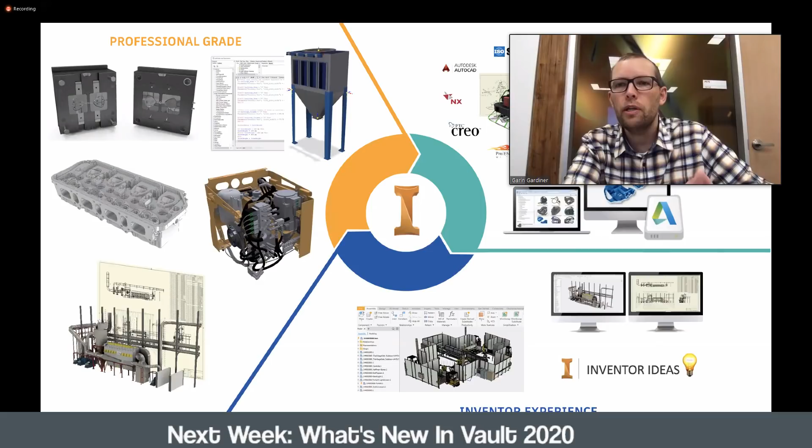We also look at the connected workflows. So that could be through tools like AnyCAD that allow you to associatively bring in non-native Inventor data into Inventor and utilize that, and look for ways that we can make that experience better. Also things like shared views, so that you can share designs outside of your organization for redlining and just conversations.

And then finally, just the overall Inventor experience. Some of that is the UI, just the experience of using the product, installation, Inventor ideas. We get a boatload of Inventor ideas every year. Dan spends a lot of time out in the discussion forums looking at what hot topics are out there, what things people are looking for, and then seeing what we can do every release in that area. So throughout today, you'll hear a number of things in each of these areas that we've really focused on and spent a bit of time on.

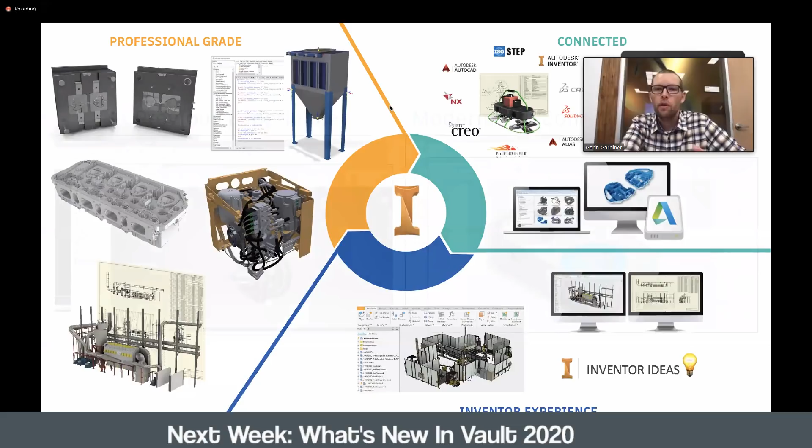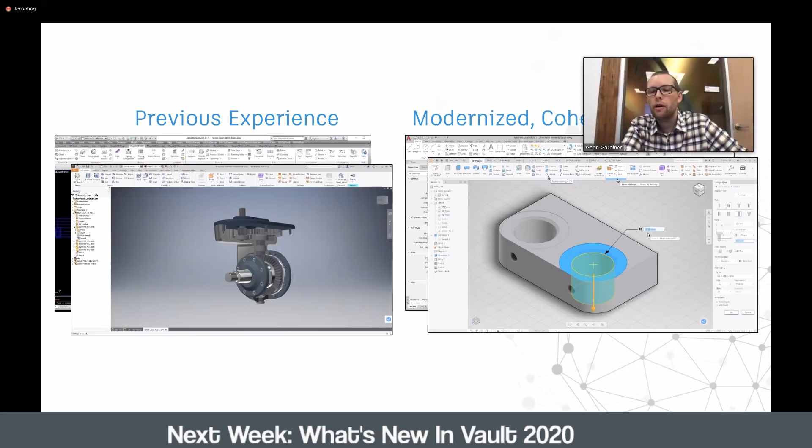One of the things we're looking at is really trying to have our products look similar, have some consistency across them. So you'll notice we've got a lighter theme, newer icons, and some consistency with a lot of those icons and the coloring with tools like AutoCAD. We've adjusted lighting styles, modernized those, brightened them up a little, an icon refresh, feature manipulators. And we've been working on what we call the Property Panel for a couple of years, and I'll get into that a little more.

It's a more intuitive, quicker way to get through a lot of your standard tools that you use day in and day out. And another thing we did, we added the ability to easily switch between a high quality, a middle, and a performant quality graphic experience. I'm guessing as you're doing most of your day-to-day work, you probably work in a performance mode, which turns off a lot of the advanced graphic requirements and speeds things up for larger assemblies.

But if you get into a presentation with a customer or your boss and you want to show nicer graphics or take some screenshots, you can just ramp that up to high quality and leverage that. A lot of these things are things you could have done in the past with just kind of hunting and pecking in a few areas. We've just made it really easy to switch between a performant and a high quality view.

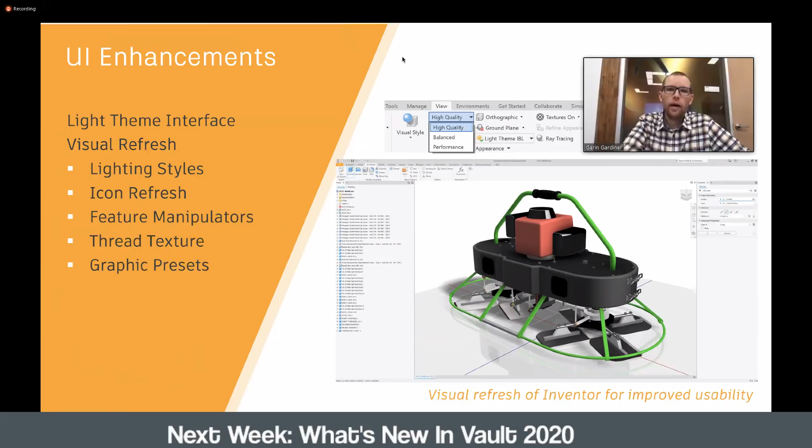So a couple things we've done around the UI. And when we talk about the cohesion and icon refresh, I've hit on that a little bit. But one of the things we spent quite a bit of time on is the property panel. We added the new property panel to measure in 2018, 2019, we added it to the Hole dialog, and now we've added it to a couple of other commands this year.

Just some thinking behind that: as customers learn the product, we found there were some inconsistencies across a number of our part modeling tools, just kind of the flow through the dialog box. And over the years, since Inventor's been out for a long time, we get questions about the layout of certain things in dialog boxes. So we wanted to step back and have a more modern experience with the property panel.

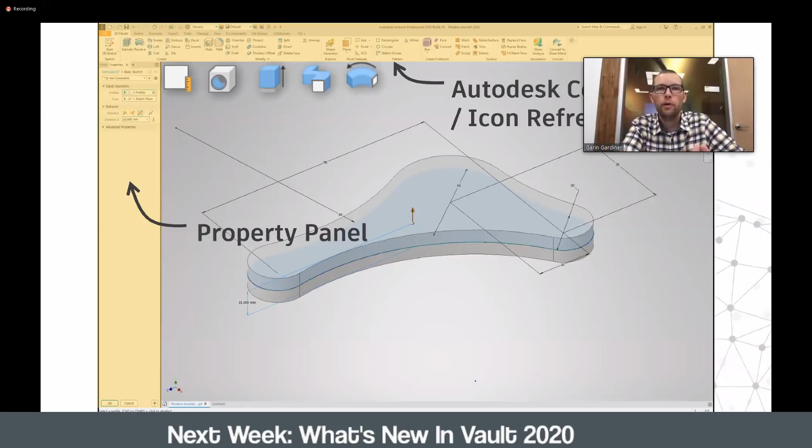It can be docked virtually anywhere on screen. You can dock it above your browser, below your browser, on the side of the browser, bottom left, doesn't really matter. But some of the things this offers—when we first started looking at this, we wanted it to be more than just a graphical change, but something that would make you faster in using Inventor.

So some of the things we added was a breadcrumb. This is probably one of my favorite capabilities with it, really. When you're using, say, extrude, maybe you don't even have a sketch yet. You can launch the extrude command and then click on the breadcrumb to sketch, create a sketch, build that sketch all while you're in the extrude command, and then toggle over to extrude and do your work there.

You may realize you need to add an element to the sketch or edit some dimension in the sketch. Instead of having to cancel out of the extrude command, go into the sketch, make a change there, and then go back into extrude, you're able to just jump back and forth all while you're in the extrude command. So that breadcrumb is really what allows you to do that.

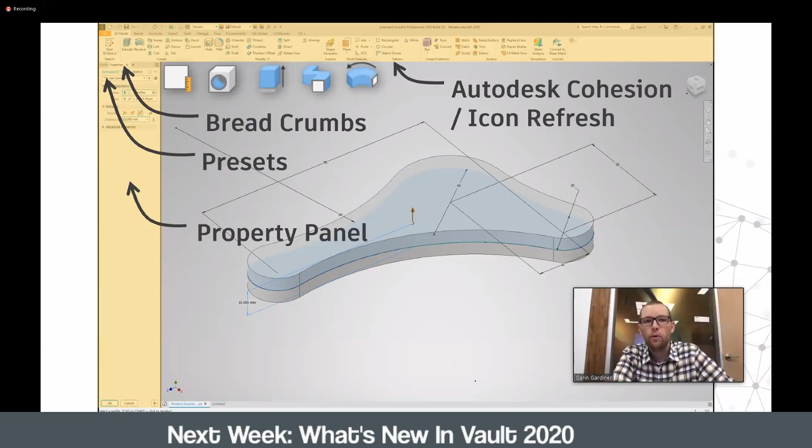And then from there, we've added presets. So anytime you see these property panels—we added this with Hole, now you'll see it with extrude, revolve, sweep and thread—you can create presets and use them, whether it's just you as an individual or your organization. You can set these up and use them anytime.

So if you have maybe a quarter inch plate and a half inch plate that you use all the time, you can set it up as a preset. If you revolve between certain angles all the time and you don't want to keep entering those values, you can set that up as a preset too. Just little things like that speed up your day in and day out as you're going through these particular tools.

We've improved the overall guides. We've had guides in here for some time, but we've had customers that, as they go through them, felt they didn't quite make sense or didn't give them enough information. So we've gone through a lot of the guides.

We've added additional information, trying to make them a bit clearer on what the tool is looking for. Edit in place, kind of along the line with the breadcrumb - when I'm in an extrude dialog box, I can edit dimensions from the extrude right from the graphic window. I can edit sketch dimensions. It gives me fluidity while I'm in that extrude to make tweaks from my graphical window instead of always having to go to my dialog box, so it makes that a bit easier.

And then a highly requested one: better multi-monitor support. We know that a lot of you guys use multiple monitors, and really being able to support those in a much better way. So those are some of the UI and graphical things that we've done.

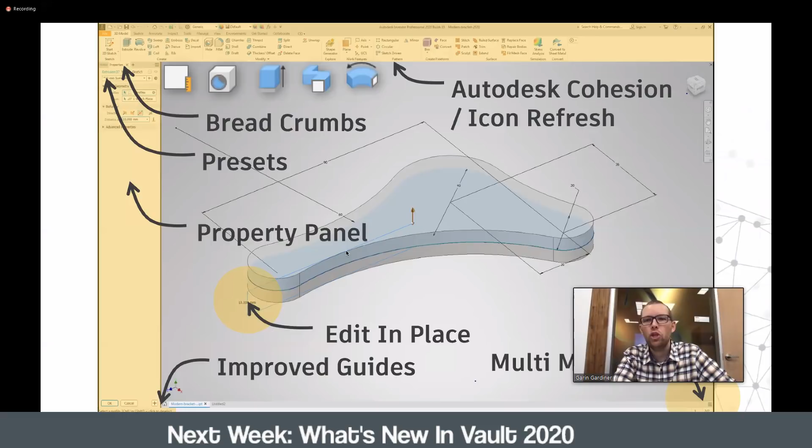I wanted to pull the curtain back a little bit and talk about some of the development process. Big changes like this, we don't take lightly. We've actually been working on this since 2015. So several years ago, we kicked off getting feedback, doing usability tests, and getting a lot of feedback from customers on what they liked, what they didn't like, and what challenges they had.

What goes into some of these things - we have tools like eye tracking, where we'll have a set of steps that we ask customers to go through, and we'll track their eyes to see where they're looking when trying to do certain tasks, getting an idea if there's a clean flow through the command or if they're looking all over the place for things. That helps us figure out if they're confused or if something's not intuitive. So we spend a lot of time with usability and eye tracking.

We really focused on customers that have been using the product for many years. Most of it was about 80% - 80% of our customers we talked to over the last 3-4 years have been using the software for over 5 years. And I've got a couple of charts to show that.

Along this process too, oftentimes we'd do A/B testing, where we'd give customers a couple of examples and get feedback on what they liked in, say, the A example versus the B example, then we'd iterate and pull the things we liked from both environments into a new experience and get feedback again. We iterated many times to make sure we were honing in on the area that made most sense for customers.

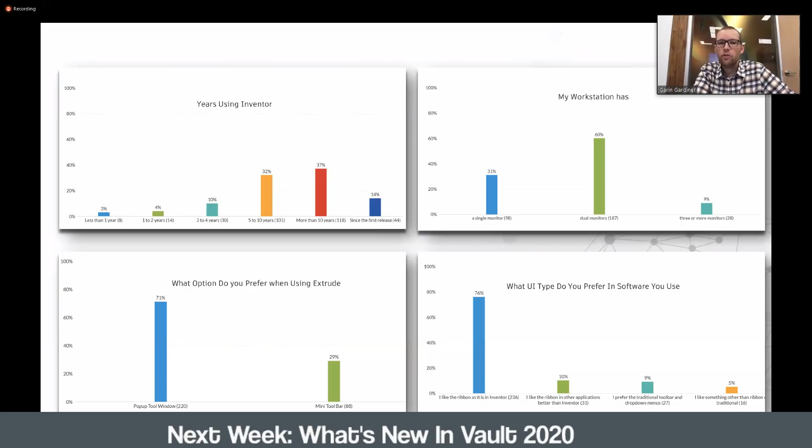We'd ask what kind of workstation they're using if they use multiple monitors, whether they like the dialog box or the mini toolbar - we definitely heard a lot of customers weren't really keen on the mini toolbar, so going into the new experience, how do we manage that? And then things like the ribbon - do people like the ribbon, do they like the ribbon from other products better? Just to get a sense of what people use and what they like.

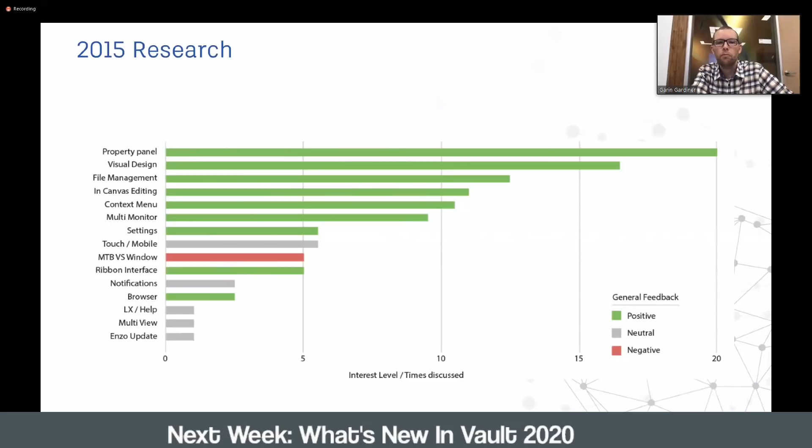In some of the 2015 research we did early on, we showed prototypes of the property panel and some of the things we could do, like the breadcrumbs. That was the highest voted thing that people really liked and wanted us to move forward on - even higher than multi-monitor, which was a little bit surprising. But those were things we felt were important to do, each of them.

So let's move on a little bit - just a couple more things here with eye tracking. As we were doing some research with customers, this was kind of our older dialog boxes.

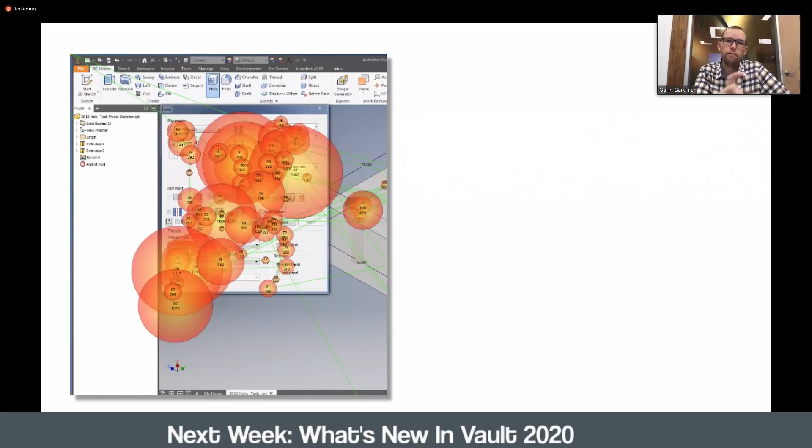So having somebody go through a task using our old dialog boxes, and then looking at what that looks like in 2019, 2020 with our new property panel, this was a pretty typical view from our eye tracking in both cases. We really tried to have it top down, so you start at the top and fill in information as you go down, with a lot less mouse travel and not looking all over the place. That was one of our key goals: to make it easier to use, faster to use, and more intuitive.

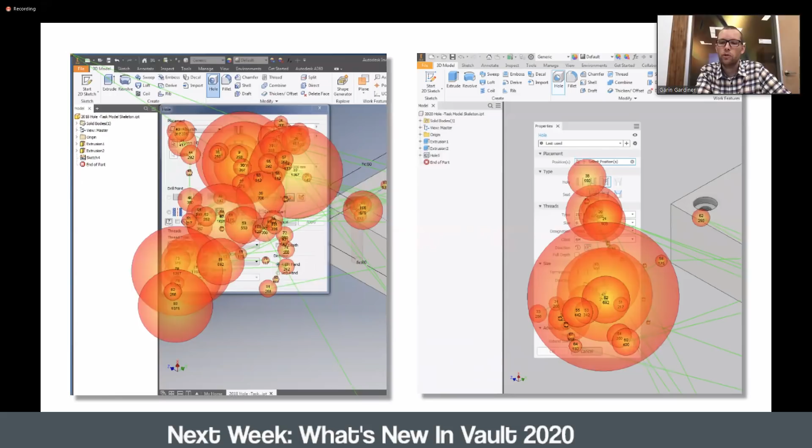So the commands we focused on in this area are extrude, revolve, sweep, thread, and frame generator. We have other commands and we're not done yet by any means. We'd like to go through and get to the majority of part modeling and then get into the assembly commands. Over the next few years, you'll see us do more and more of these, tackling a lot of the ones used most often.

And of course we love getting feedback, so as you guys jump into 2020, play with it and certainly give feedback to us. We did that with Hole a lot to get it where we felt it needed to be before we did some of these other commands.

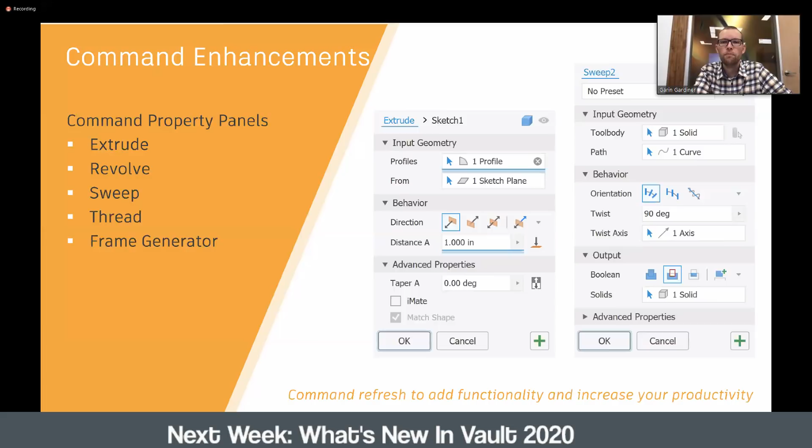Moving over to multi-monitor support - and I've got a video to show some of these things - this is something we see most of our customers, 60+%, use multiple monitors. And the experience wasn't great before. It was okay, but we wanted it to really look and feel like it supported multiple monitors.

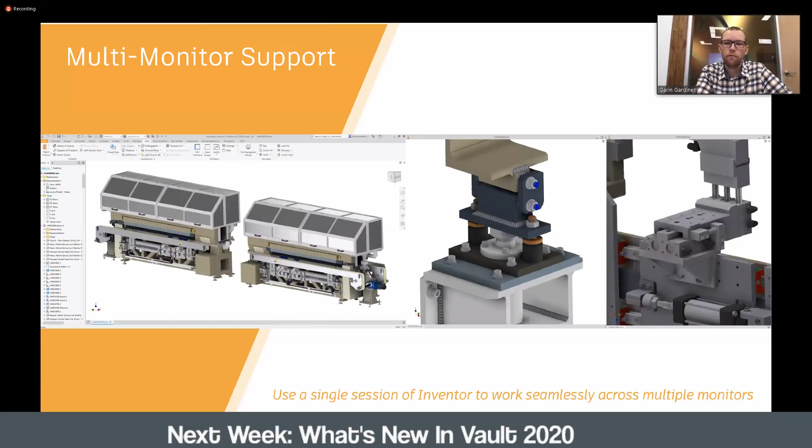So being able to grab a part or a subassembly, dock it over to another monitor, possibly dock multiple of those. When you're done, close one, go back to the overall assembly, and just have it work as you'd expect. That's exactly what it does today. Customers that have played with it have really liked having much better support there.

And this is solid sweep. This is one we've had as a customer request for many years, and we were hoping to release this last year. It just wasn't quite ready, so it had a little more bake time, and here it is. It solves some pretty difficult problems - customers sometimes need to take a solid object, sweep it along a path, and remove or add material based on that.

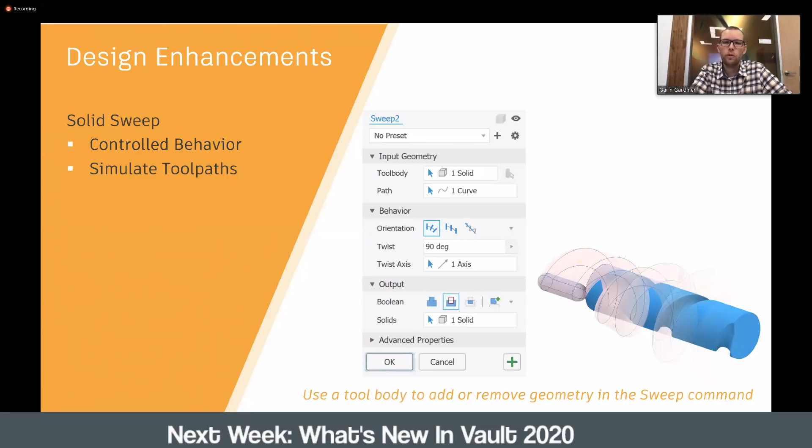In this example, you can see a little dowel being swept along a helical path to create or cut material out, basically to pivot this pin 90 degrees in an assembly line. Again, pretty hard to do it any other way. It works really well, and it's really nice to have that in the product.

Another one is unwrap. We know a lot of customers use sheet metal, and in some cases some of the sheet metal objects you need to flatten aren't really able to be flattened with our sheet metal flatten tool, a lot of that has to do with the flattening algorithm and how the metal deforms.

So when you run into cases where you're not able to flatten things, we've introduced this new unwrap, and not just for sheet metal - if you're using fabrics or all sorts of objects, you can pick a face and just flatten or unwrap it. It's not taking K factor into consideration - it's basically just unwrapping that and giving you options like keeping circles circular, or slots or edges vertical, or just straight edges. So you have some nice control there.

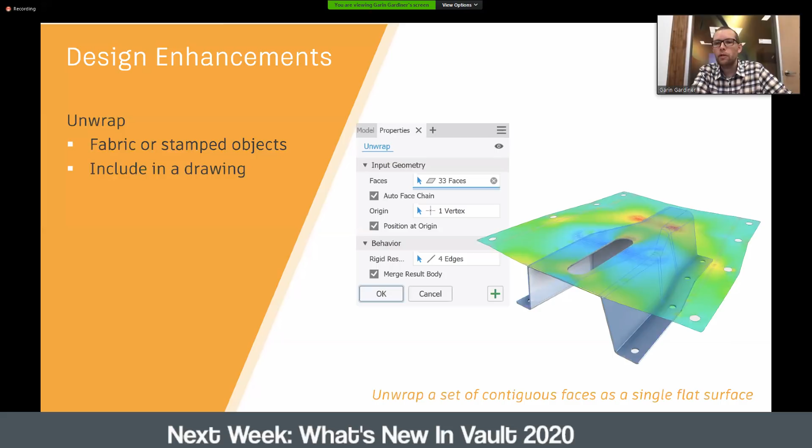And then from that you can create a drawing, or extrude it as a solid object. It's associative to the underlying 3D geometry, so it's a great little tool. We've had a number of customers who know the geometry may not be exactly perfect, but it allows them to get there a lot faster than all the iterations they do today to try to get the geometry they need. So we're excited to get that out there and get people playing with it.

Some other things: when you're extruding with taper turned on, sometimes you get faces that become disjointed, and we now have an option to merge those faces so it gives you much more of a desired outcome. We've also added loop selection, so when extruding something - and this is pretty huge for a lot of you - as you're extruding, using any of the features, you can now pick profiles in the sketch.

In the past, you'd have to do a bit of trimming sometimes, or create multiple sketches, or use the trick where you put points at intersections to help find the profile detection. Those days are gone. Now you can find those loops much easier, and it works a lot better and a lot easier than in the past.

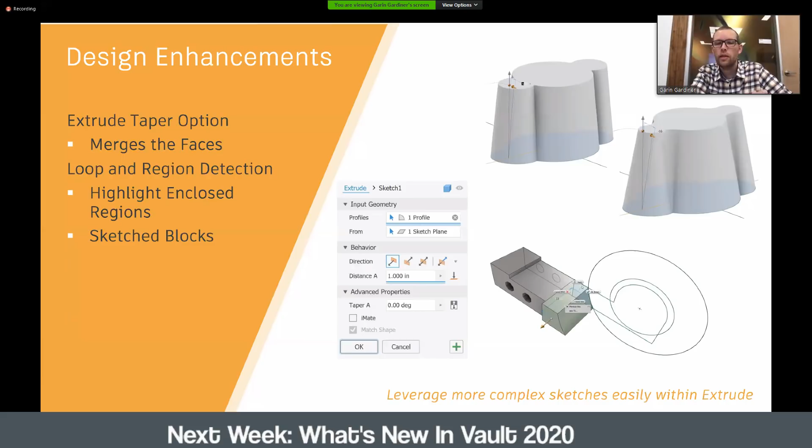And then finally here, sketch blocks. Now you can see what features have consumed those sketch blocks.

Hopefully this video comes over okay, turn the audio off. But you'll see this example of the swept profile or the solid sweep, kind of that outcome. You'll see creation of that in a minute.

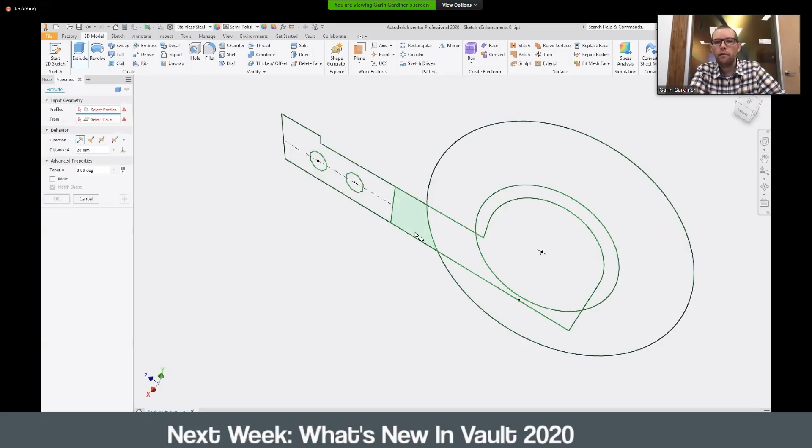In here, you can see just grabbing individual loops. So instead of having to trim a lot of that stuff out, you can just go along a sketch and grab the pieces you want, very easy. Here you can see the relationship of sketch blocks, so being able to see the child-parent relationship.

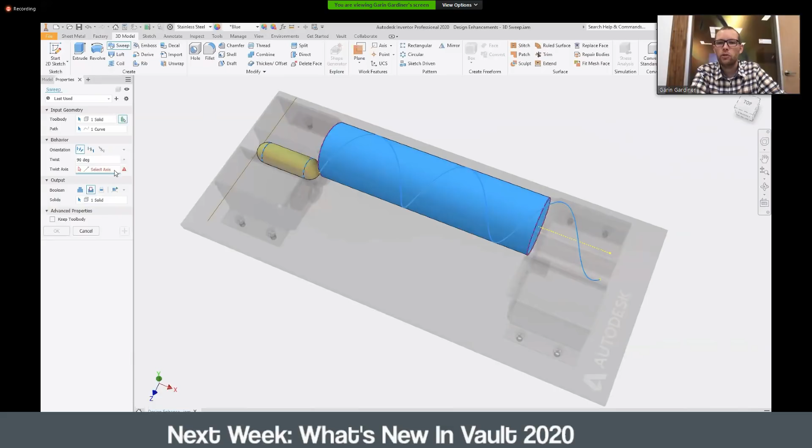Solid sweep: grabbing a solid object, picking, in this case, a helical path. From here, you can adjust the twist and angle of how this solid is going to be swept along, and then remove that material. I truthfully don't know how you'd go about doing this any other way. This would be pretty difficult, so customers doing that kind of stuff, this will help a lot.

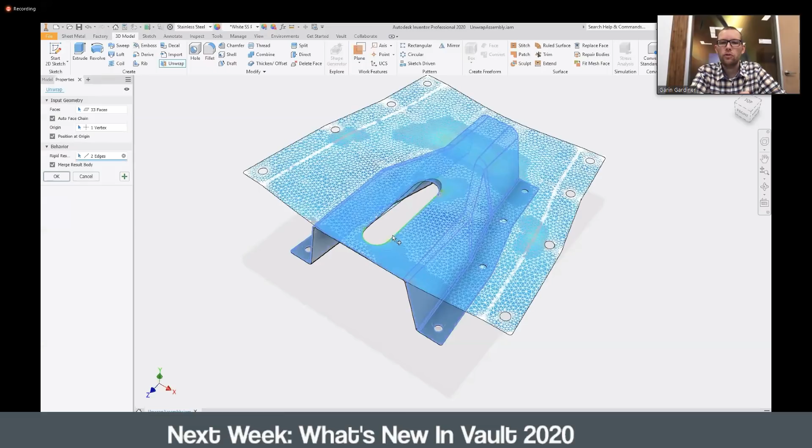And then the unwrap, being able to pick a face and unwrap it. You'll notice in this video, you can pick an edge to keep it linear. If you have holes or a slot, you want to make sure that slot is not twisting or turning, so you can pick those edges and make sure it's not deforming it in any way, keeping the important parts the shape you're looking for, and then be able to utilize that downstream.

So those are just a few things in 2020 in the part modeling area.

Let's jump over to frame generator, another area that a lot of our industrial machinery customers use a lot. We've updated it with the property panel, so now you'll see the new modern experience with the property panel. End caps, that's been a highly requested feature for a while, being able to have end caps in there.

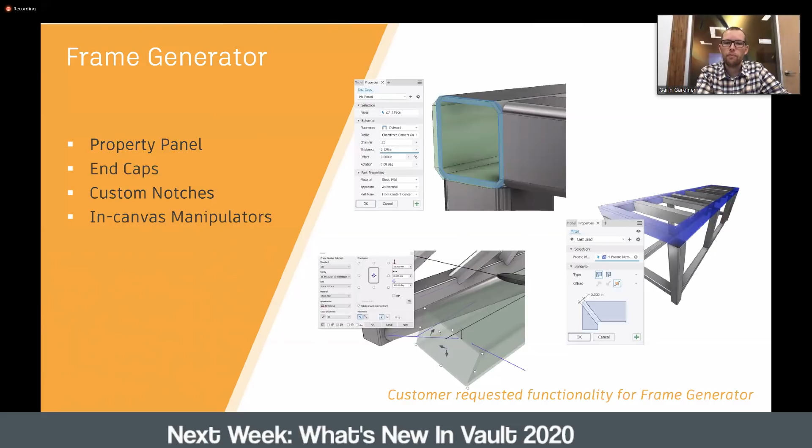Custom notches, and then in-canvas manipulators with all the previews and everything, much easier to see what's going on when you're making adjustments, trimming, and extending, and doing those types of things. Here's another short little video that will walk us through some of that.

There we go. So you can see some of the manipulators, some of the multi-notch support.

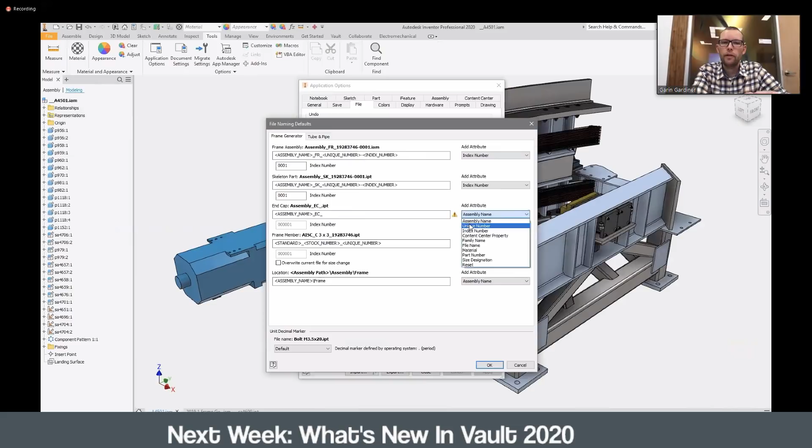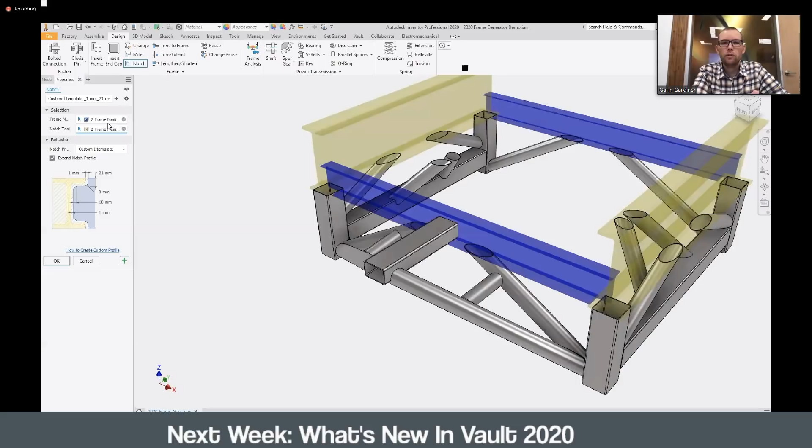Multi-trim and notch in the dialog, you can see the new presets. Really just kind of modernizing the experience here, making it faster and easier to do some of the common workflows that you use.

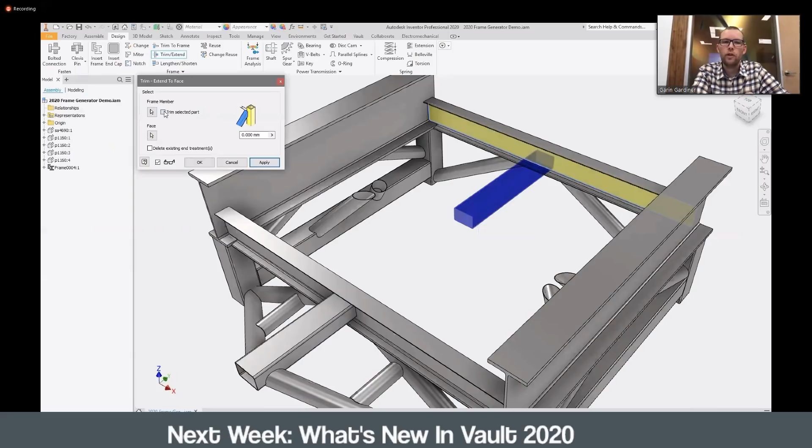With things like the coping here, if you're doing laser cuts, you can do a perpendicular cut there, so you get the shape, the outcome that you're looking for. And then here, being able to specify what side you're trimming a member to. So again, just a lot of adjustments, making it easier to get your frame members, be able to trim, get what you want, property name or file names, all those types of things. And then being able to support that in end caps in things like Content Center.

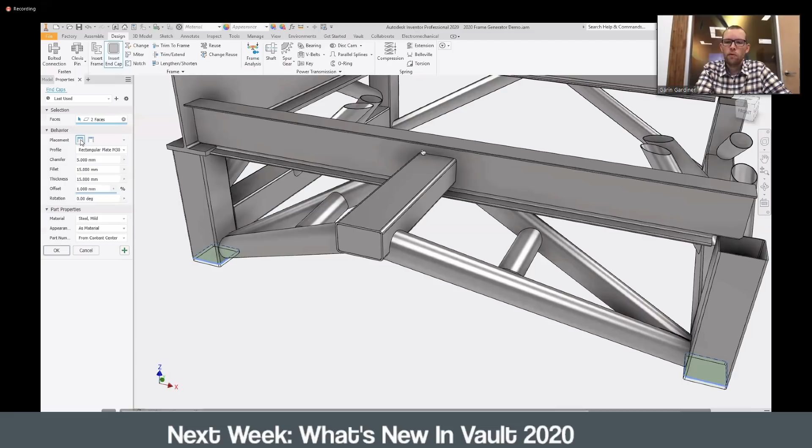All right, some of the customer-driven improvements.

Again, a lot of our customers use sheet metal, no surprise there. In doing things like mirroring sheet metal parts, oftentimes it's a little bit hard to control the two different sides if you're changing material thickness or various style property differences. Now you can link the styles, so if you mirror it over, what you do to one style can replicate over to the other style, keeping consistency across those two parts.

Joints: there are cases where you may have a slot and you're wanting to constrain to the center of a slot instead of having to put work geometry and things like that in your model. Now with joints, you can select the center of the slot and constrain that, making it quite a bit easier than current workflows.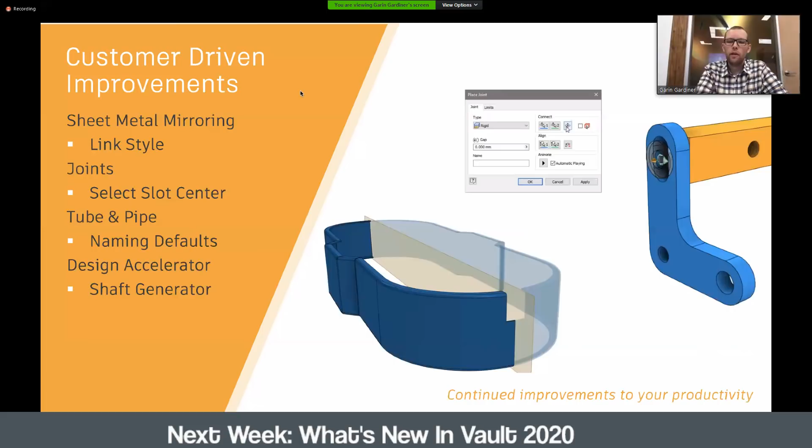Tube and pipe naming, you can change the naming defaults, some adjustments to design accelerators, the shaft generator, just some overall goodness there. And on the interoperability side, if you're using any CAD where you're bringing in things like SolidWorks files, CATIA, STEP, any of those, we have updated the versions. So as CATIA, SolidWorks, Rhino have new versions, we've now updated those so they can come into 2020 as well.

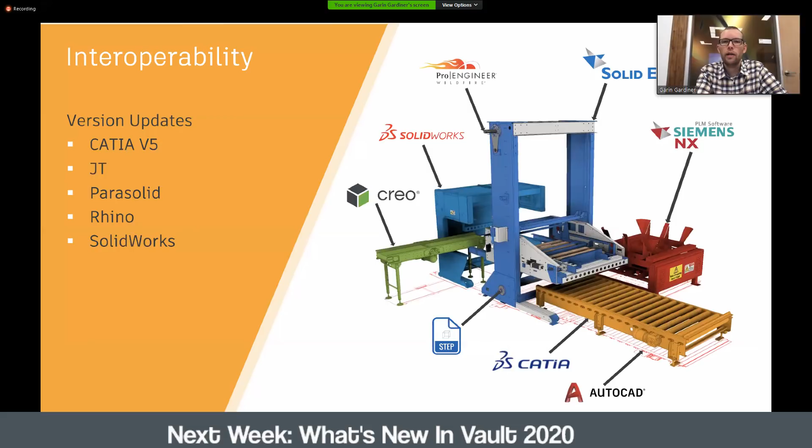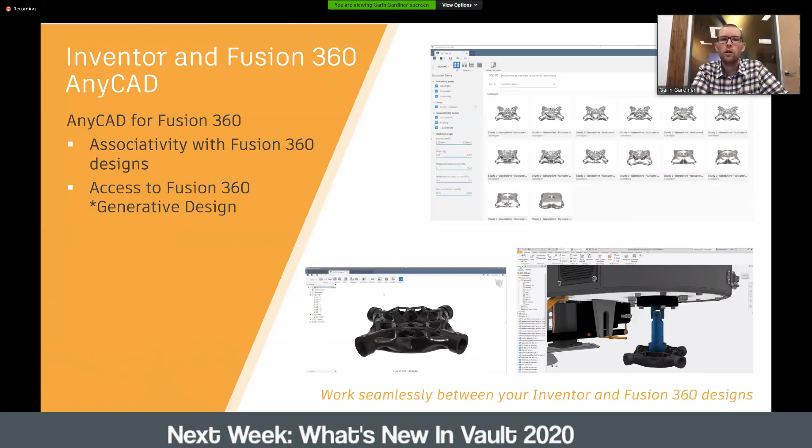Just making sure that you have the ability to use those files in your designs when necessary. And on interoperability as well, so Inventor and Fusion 360, if you're doing any generative design or working back and forth, we're making it much easier to bring in that Fusion file directly inside of Inventor. You can just browse out to it and bring it in. It's not this export, import any longer, so it makes it easier for you to leverage that capability.

On the performance side, we hear a lot of requests every release around performance. So there was a lot of work done for in-place editing, window selection, things like view orientation, component patterns. On component patterns, if at a part level you have a large pattern that you're making adjustments to, and you're doing that at an assembly level, you kind of get hit twice making the change there. And if you have an associative pattern for fasteners, it has to calculate that too. So now it's just generating that pattern much, much faster, whether it's part or assembly, but you'll see that much quicker in your assemblies generating that.

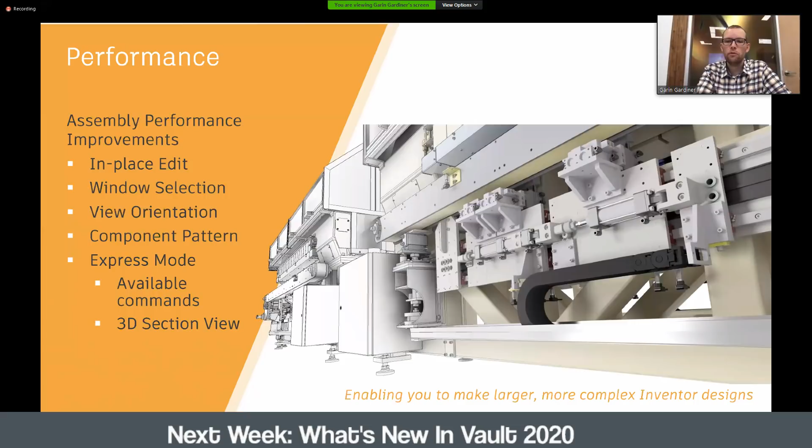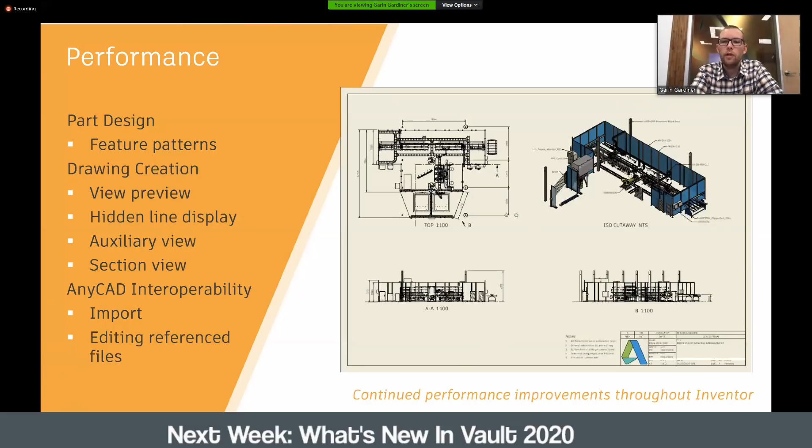Express mode, being able to view your models much easier for those customers that don't have Inventor. And then some additional things, I mentioned the feature patterns already, but drawing creation, view previews are much faster, hidden line display, auxiliary views. A lot of these things you'll find as you're in there are just much snappier, much faster and easier to use. So hopefully, as you guys are creating complex, large drawings, you'll notice a lot of these things.

And then we've got a little video that will take us through this, and then maybe we'll open it up to some questions. I think right after this, we have the product design and manufacturing collection, so maybe we'll take some questions on Inventor before that, and then we'll wrap up with some of the collection capabilities.

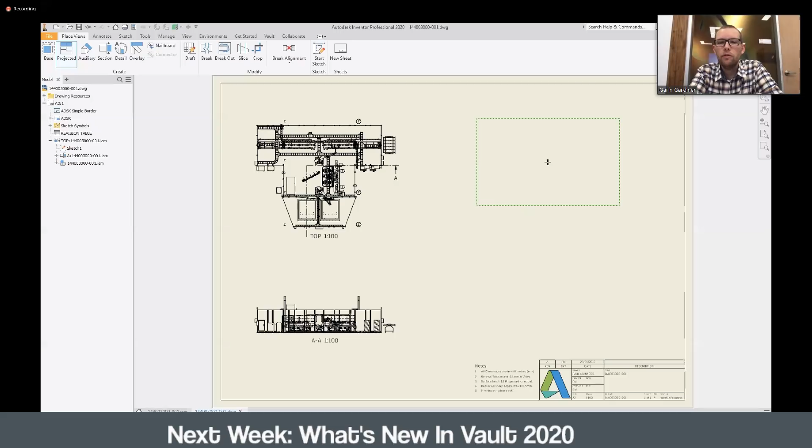But in here, you'll notice just kind of overall navigation. We've got a section view here, visually being able to section this much easier, inserting a part, adjusting a dimension. All of those things are just a bit faster and a bit easier for you to go in and do.

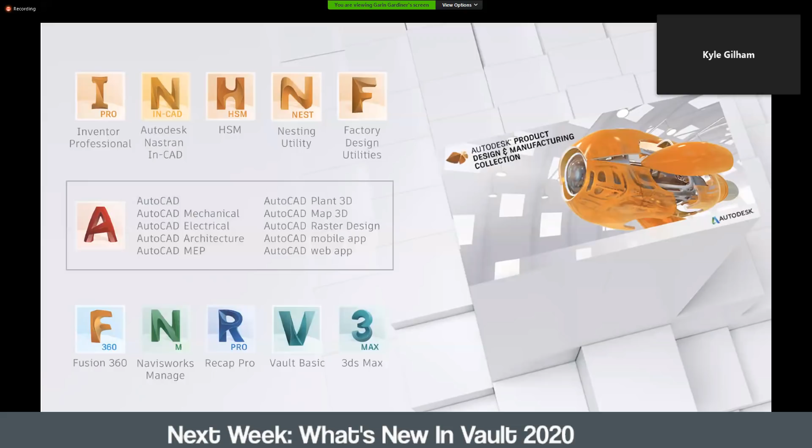Jerry asked how Unwrap is beneficial when it doesn't take into account expansion or contraction of material, similar to stamping a sheet metal part. That's exactly the use case. When you have an extreme deformation and you're using a standard modeling practice that doesn't leverage the standard sheet metal bends or folds, there was just no workaround to actually obtain a flat pattern. It was very difficult to extract that.

So our intention for the Unwrap command is to allow you to select any face on a part file, whether it's sheet metal, a 3D part modeled with standard practices, or even a step file imported from some other CAD package, and select that face to get a rough estimate of what it would look like if it was stamped or deformed - the footprint, the blank size it would take before a press hits it, or whatever might deform that feature.

So again, it's just taking topology. We're not touching the bend allowances or sheet metal styles - that's still all in place for standard sheet metal parts. We should still use that for regular typical use cases. But again, it's just another tool that allows you to work around a scenario where you might not be able to extract a legitimate flat pattern.

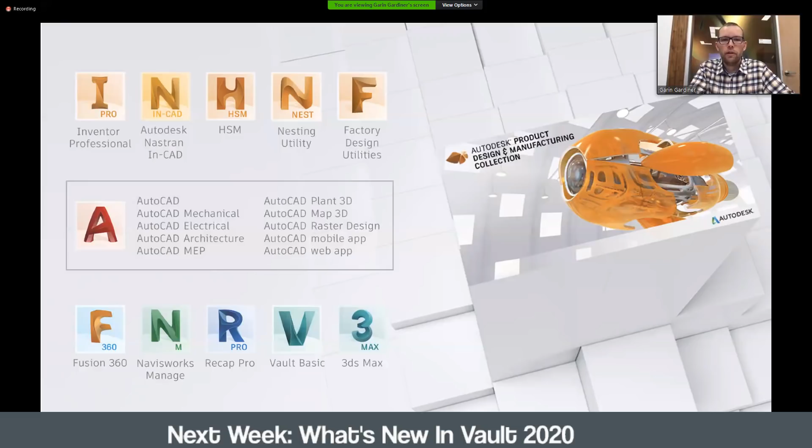A lot of people know of Inventor, but are a bit confused when they go to their manage page and see things like Nastran, HSM, not really knowing what they were, or if they were standalone desktop applications or part of an Inventor add-in. So one of the things we did this year was rename all of the collection tools that worked inside of Inventor.

The nesting utility is now Inventor Nest. Nastran In-CAD is now Inventor Nastran. And Inventor Tolerance Analysis, we named that last year because we knew where we were going with this. One of the big reasons was to make it clear that these are add-ins for Inventor, utilizing the Inventor brand name.

So you'll notice, if there are things we add in the future, we'll follow this nomenclature. If you're going out to the manage page looking for something like HSM, it's now Inventor CAM, and that's the rationale behind that. We are working on things like the discussion forums to get that all cleaned up with the same naming over the next couple months.

A big change, if any of you are using the Factory Utility, that actually came into the larger Autodesk organization. It's managed under the same group, which is really great because now, across the Inventor product, having it all under the same team is really helpful. You may not notice anything right now out of the gate with Factory, but behind the scenes there are some nice things going on, bringing teams together, working together.

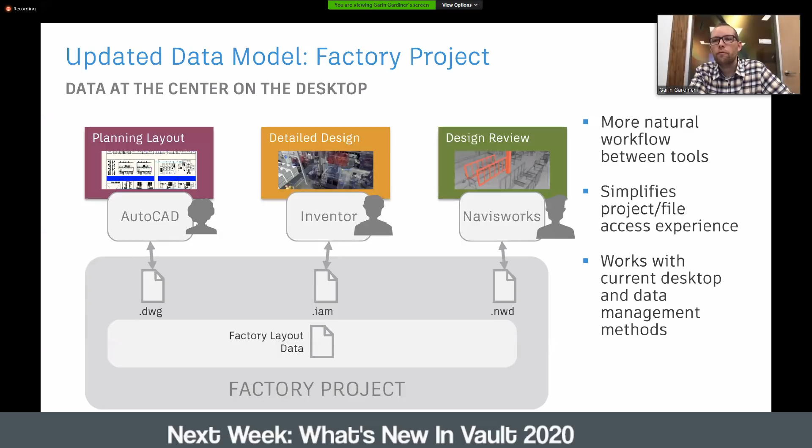A couple things I'll highlight: the tolerance analysis tool, I don't know how many of you have used it, but we've added some features for 2020. It now supports insert constraint and sub-assemblies, which were a couple things we didn't support at launch.

For tolerance and Nastran, there's been work done to make it easier for our standalone Nastran customers to use Nastran inside of Inventor, so Inventor Nastran has some nice tools just to streamline that. And for some of our old simulation tools, there's also been work on Inventor Nastran to make the transition over easier, making it simpler to move your older workflows onto the Nastran engine.

Nesting has had a boatload of updates from all the point releases, changing a lot over the year. It started out as sheet metal only, now you can do it with non-sheet metal parts as well, with a whole slew of enhancements over the year. For CAM, there's not a lot of adjustments—there are some great things coming on tool libraries and things like that down the road, but not any big changes on the CAM side at the moment.

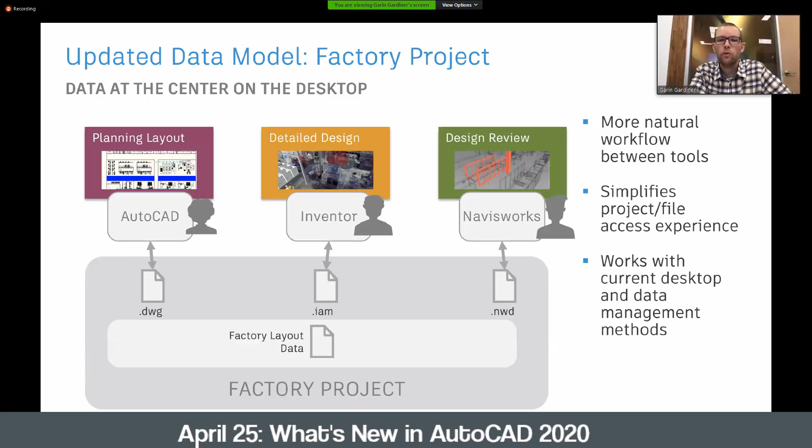So really it's rebranding, and I'm working through some of that, but hopefully that helps on the collection side. That doesn't cover AutoCAD—I know you guys have another webinar around AutoCAD and Vault and some of those tools, so I'm not going to get into that. But at a high level, that's kind of where we're at. When you go into your manage page, names have changed a little bit, so get familiar with that. There's an FAQ document and an Inventor blog that covers some of these, so you can go look at those articles as well. But at a high level, that's pretty much what I had for everybody.

As I mentioned earlier, certainly spend some time out on the feedback portal, the idea page. We spend a lot of time there—Dan spends a lot of time, Chris spends a lot of time out there, so does Kyle and Johnson Shui, if any of you know Johnson. There's just a lot of time we spend looking at what people are saying, what challenges you guys have, and helping roll that into future versions of the product. So again, we'll open it up from there and wrap up.